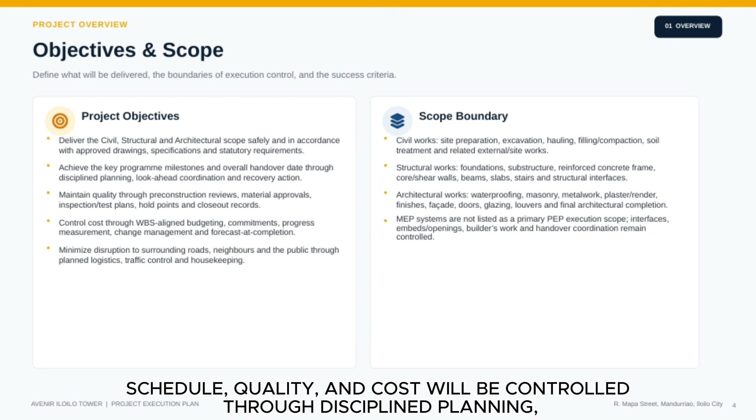The project objective is to deliver the civil, structural, and architectural scope safely and in accordance with approved requirements. Schedule, quality, and cost will be controlled through disciplined planning, inspections, measurement, and formal change management. Site logistics will also minimize disruption to surrounding roads, neighbors, and the public.

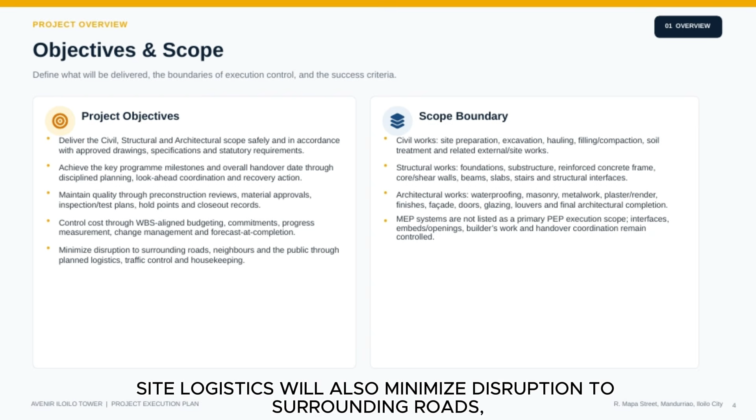The key deliverables begin with mobilization, site controls, and an approved technical package. Then continue through civil and substructure works, the reinforced concrete superstructure, and architectural completion. Final deliverables include punch list closure, as-built information, warranties, support documents, and formal handover.

Project governance combines executive sponsorship, technical leadership, procurement, and financial control with the site delivery team. Key stakeholders include the President, General Manager, Vice President and AMO, Procurement Manager, Head Engineer, Head Technical, and Finance and Accounting.

Decisions are made at the lowest competent level, with clear escalation for safety, technical, program, commercial, or client impacts.

The project organization places the project manager at the center of delivery accountability. The construction manager leads site execution, supported by civil engineering, architecture, planning, quantity surveying, quality, safety, document control, and administration. Corporate procurement and finance functions provide supply chain and financial support. Management and engineering roles are defined to prevent gaps at interfaces and accelerate decisions.

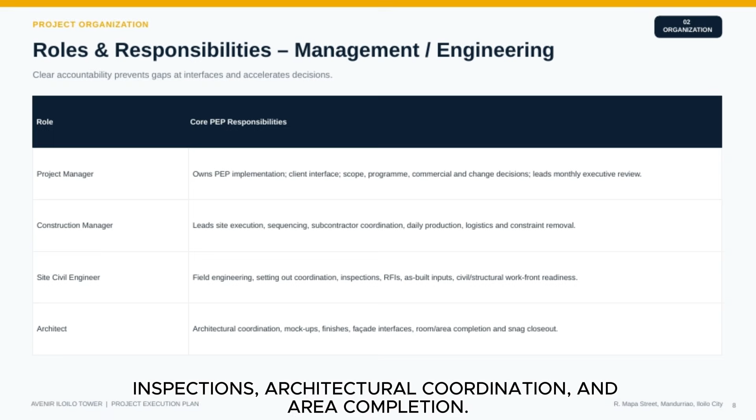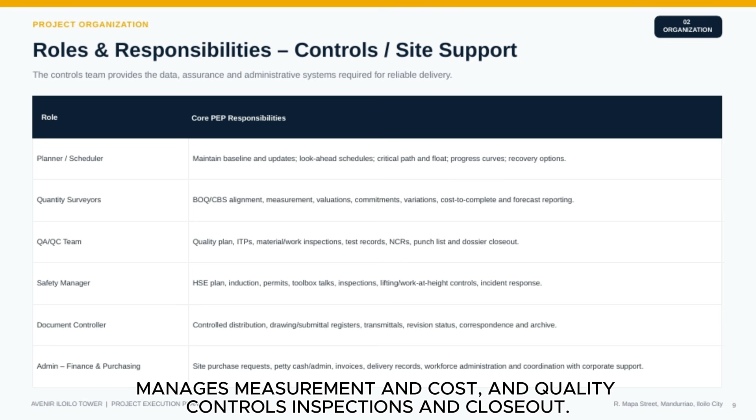Project controls and site support functions provide the information and assurance needed for reliable delivery. Planning maintains the baseline and forecasts; quantity surveying manages measurement and cost; and quality controls inspections and closeout. Safety, document control, and site administration maintain compliance, records, purchasing, and workforce support.

A consistent communication rhythm converts field information into timely decisions. Daily coordination and toolbox briefings are supported by weekly technical, progress, and quality reviews. Monthly executive, commercial, and procurement reviews integrate schedule, cost, quality, safety, risk, and supply chain status.

Document control ensures that only current and approved information is released for construction. The workflow moves from preparation and registration through review, submission, approval, release, and archive. Controlled registers cover drawings, technical queries, submittals, inspections, nonconformances, correspondence, and as-built records.

The execution strategy follows 5 coordinated stages. The project moves from mobilization and approvals into civil and substructure works, then the vertical superstructure. Progressive architectural fit-out follows on released work fronts, before closeout and handover.

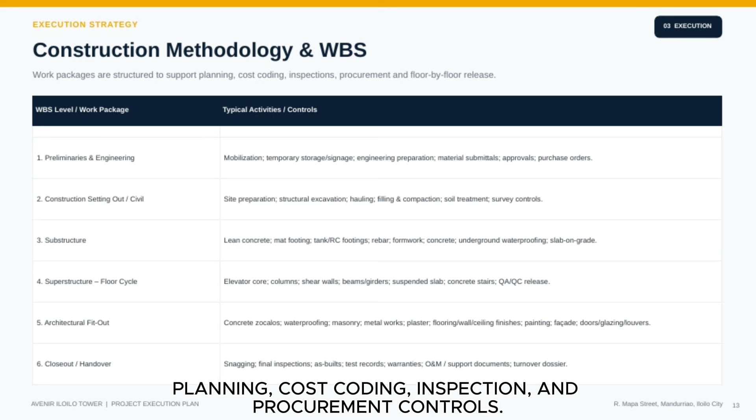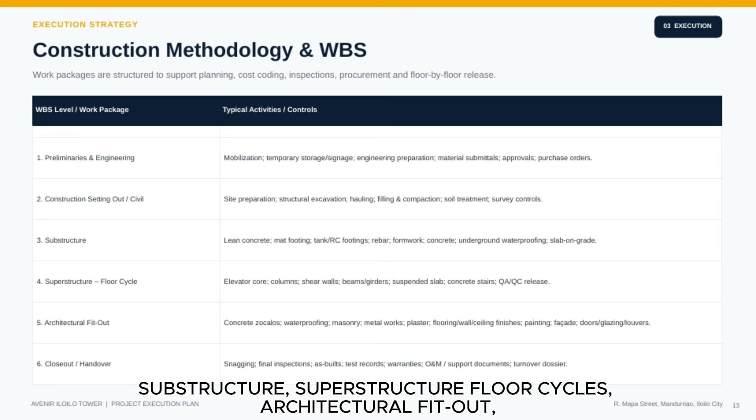The work breakdown structure aligns construction packages with planning, cost coding, inspection, and procurement controls. Major packages include preliminaries and engineering, civil works, substructure, superstructure, floor cycles, architectural fit-out, and closeout. This structure supports clear accountability and floor-by-floor release.

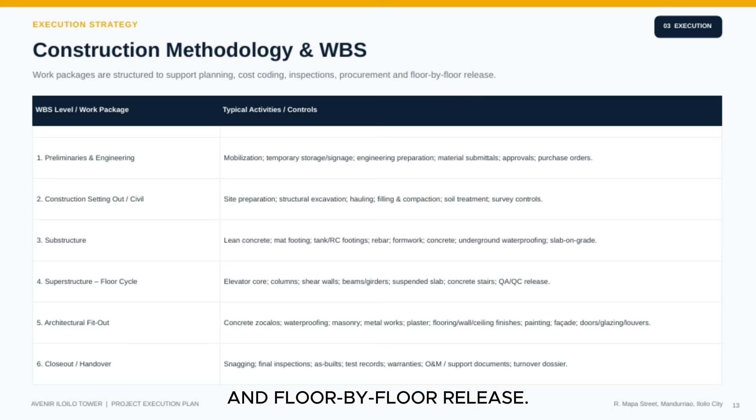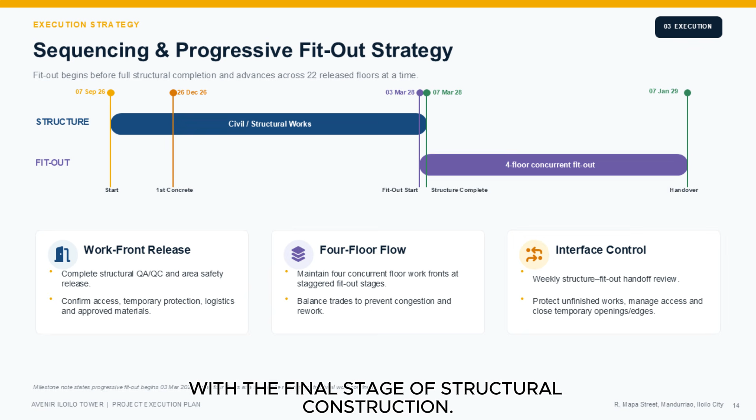The program uses progressive fit-out to overlap architectural work, with the final stage of structural construction. Released floors are checked for quality, safety, access, protection, logistics, and material readiness before fit-out starts. Concurrent work fronts are staggered to reduce congestion, control interfaces, and ensure the January 2029 handover.

Resources are loaded against the approved program and rebalanced through look-ahead planning. Peak manpower is stated at 355 personnel, with tower crane installation planned in December 2026 and passenger hoist installation in mid-2027. Labor, equipment, and materials are monitored for readiness, maintenance, traceability, and timely distribution.

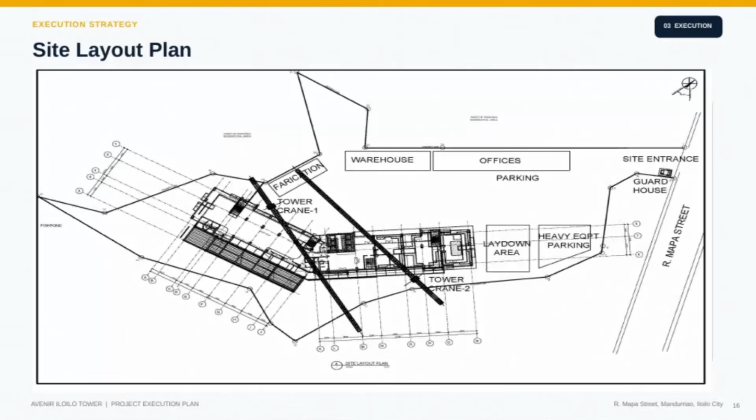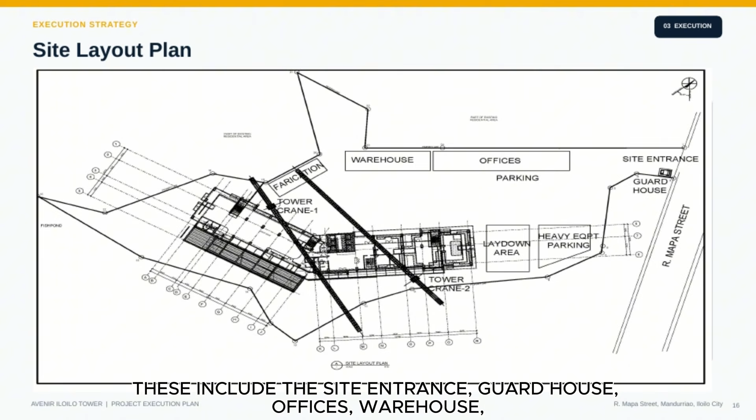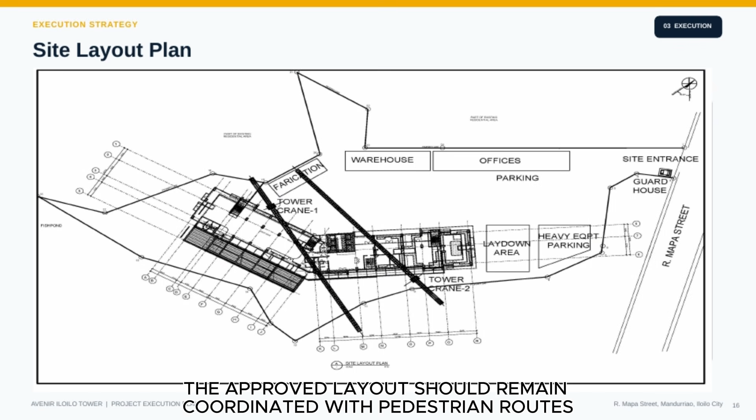The site layout plan identifies the principal temporary facilities and construction logistics zones. These include the site entrance, guardhouse, offices, warehouse, parking, laydown area, heavy equipment parking, fabrication area, and tower cranes. The approved layout should remain coordinated with pedestrian routes, emergency access, fire lanes, and lifting operations.

Site logistics are managed to protect safety, productivity, access, and material condition. Labor entry, delivery booking, lifting controls, receiving, inspections, protected storage, and just-in-time distribution are coordinated daily. Housekeeping, waste segregation, debris removal, and clear emergency routes are maintained throughout construction.

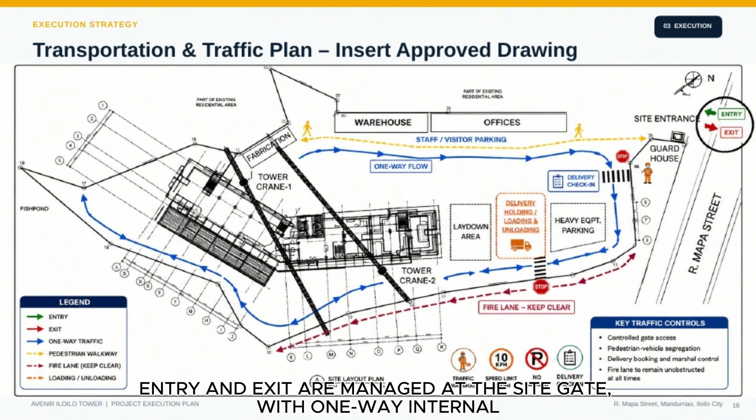The Transportation and Traffic Plan establishes controlled movement between R. Mapa Street and the construction site. Entry and exit are managed at the site gate with one-way internal traffic, pedestrian segregation, delivery check-in, and a designated loading and unloading zone.

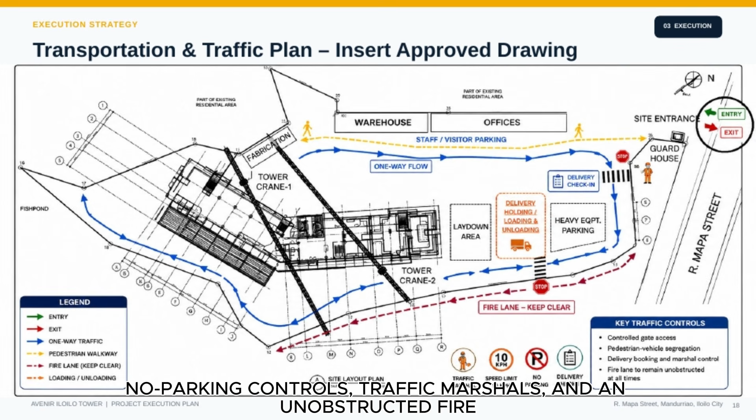Stop points, crossings, a 10 km/h speed limit, no parking controls, traffic marshals, and an unobstructed fire lane support safe operations.

Procurement is schedule-driven, technically controlled, and transparent from planning through acceptance. Packages are pre-qualified and evaluated for safety, technical, compliance, commercial value, and program capacity before award.

Approved submittals, purchase orders, fabrication, delivery, inspection, expediting, and performance monitoring are tied to required on-site dates. Schedule management uses one controlled Primavera P6 baseline for planning, status, forecasting, and recovery. Actual dates, remaining durations, physical progress, logic, float, and constraints are updated routinely.

Three-week look-ahead planning and recovery actions are used to remove constraints before critical milestones are affected.

The Executive Master Schedule runs from September 2026 through January 2029. Key phases are engineering and preliminaries, civil works, substructure, superstructure, progressive architectural fit-out, and final handover. Major milestones include first concrete in December 2026, fit-out start in March 2028, and handover in January 2029.

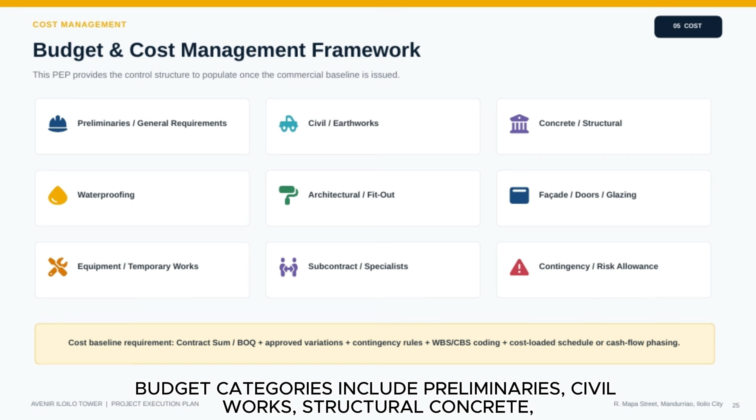The cost management framework is organized around the work breakdown and cost breakdown structures. Budget categories include preliminaries, civil works, structural concrete, waterproofing, architectural fit-out, facade works, temporary works, specialists, and contingency. The commercial baseline will combine the contract sum, bill of quantities, approved variations, coding, and cash flow phasing.

Cash flow forecasting is based on measured progress, procurement, commitments, actual cost, accruals, and forecast to complete. Monthly cost reports compare budget, commitments, actuals, accruals, forecast at completion, and variance by cost code. Variations and payments are controlled through documented instructions, impact assessment, measurement evidence, and approval.

Quality is planned before work starts and verified through controlled inspections, testing, and records. The quality cycle is to plan, approve, inspect, test, correct, and close. Approved drawings, method statements, inspection and test plans, samples, certificates, non-conformance controls, and turnover records provide traceable assurance.

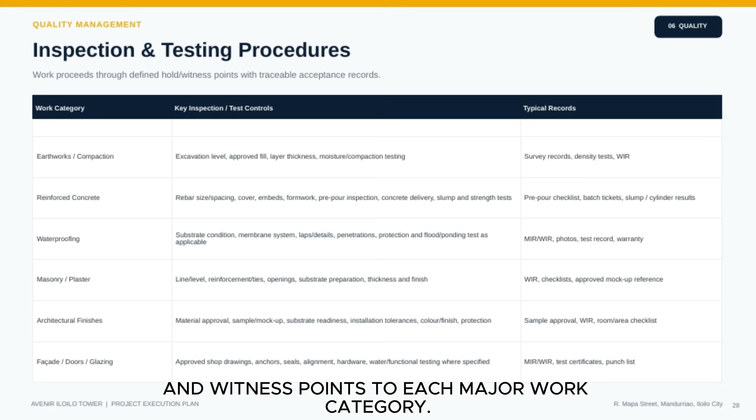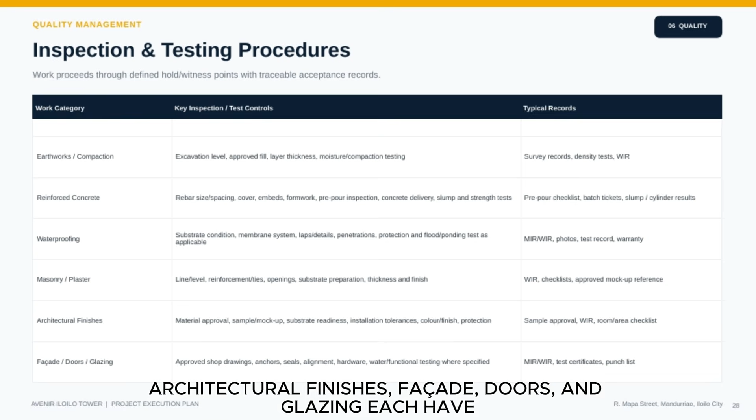Inspection and testing procedures apply defined hold and witness points to each major work category. Earthworks, reinforced concrete, waterproofing, masonry, architectural finishes, facade, doors, and glazing each have specific acceptance checks and records. Work proceeds only after required inspections and tests are documented and accepted.

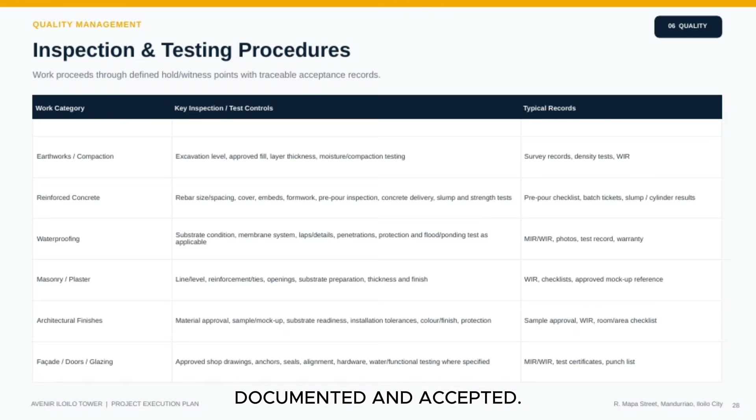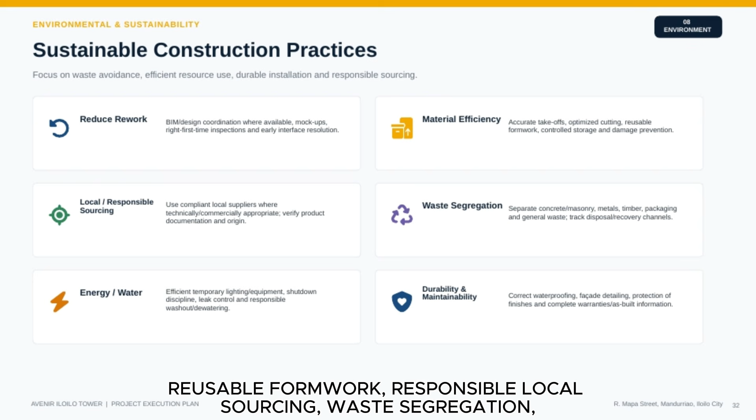Sustainable construction focuses on reducing waste, avoiding rework, and using resources efficiently. The plan encourages coordinated design, accurate takeoffs, reusable formwork, responsible local sourcing, waste segregation, and efficient temporary utilities. Durable waterproofing, facade detailing, finish protection, warranties, and as-built information support long-term maintainability.

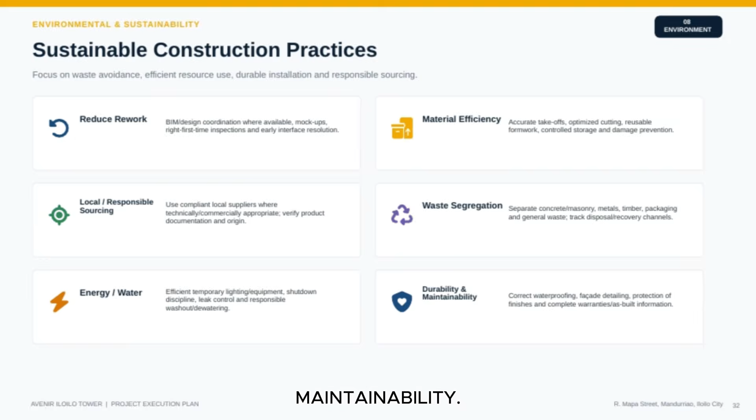Appendix A reproduces the original key program milestone source. Appendix B, Master Schedule, pages 1 through 30. This Primavera P6 printout provides the detailed activity sequence supporting the project program.

Appendix C, Critical Path Method, pages 1 through 3. This printout supports detailed review of critical and near-critical activities.

And this concludes the Avenir Iloilo Tower Project Execution Plan presentation. Thank you.